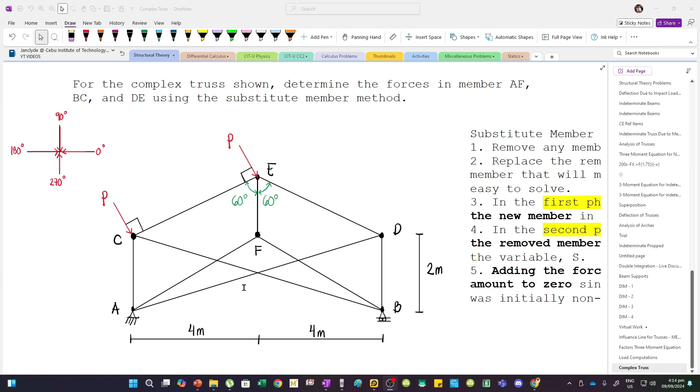So we have this truss. Ito. Imo-model natin yan. Now dito sa app natin, it's ideal to start sa origin talaga. So sa coordinates 0, 0. So yan yung A natin.

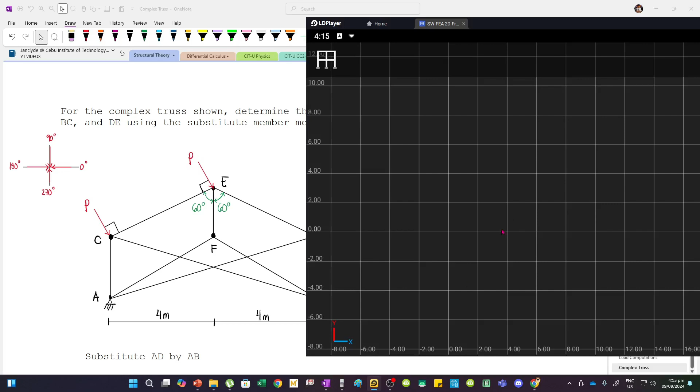So add tayo ng node. Press mo lang to. Yan. And then, wait lang. Remove ko lang to. Ito, merong delete button. Yan. So add tayo ng node sa 0, 0. Diyan. So ito yung nag-act as joint A.

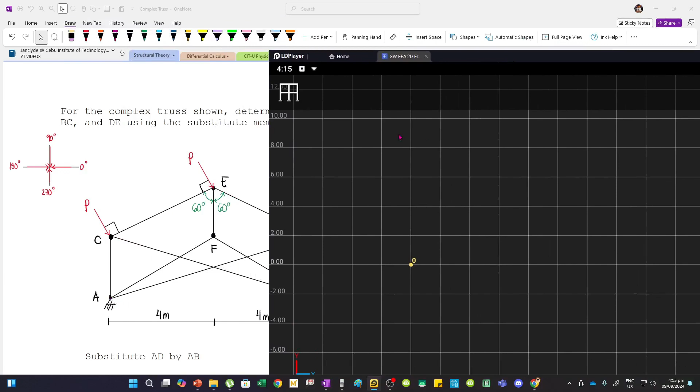So yung joints pala natin, yan yung lalagyan natin ng node. So meron tayong joint sa A, C, F, E, D, saka B. Yan. So next, we have joint C. For joint C, at 0 siya, x equals 0, height niya naman is 2 meters. So, 0 saka 2 meters. Yan. This is joint C.

And then, at 8 meters along X, we have joint B. So, punta tayo dito, and then, 8. Yan, 0 yung height. And then, the same, we also have another joint right here, which is joint D. This one. And then, at 4 meters, we have joint F, still at a height of 2 meters. So, eto, 4, saka 2.

Yan. And then, we have joint E. Now, yung joint E, it requires a bit of calculation kasi hindi natin alam yung length ng member na to. We are only given an angle with respect to the vertical axis. This one, 60 degrees. Now, di ba, along the same line yan, so, we can draw a broken line para mas makita nyo yung triangle.

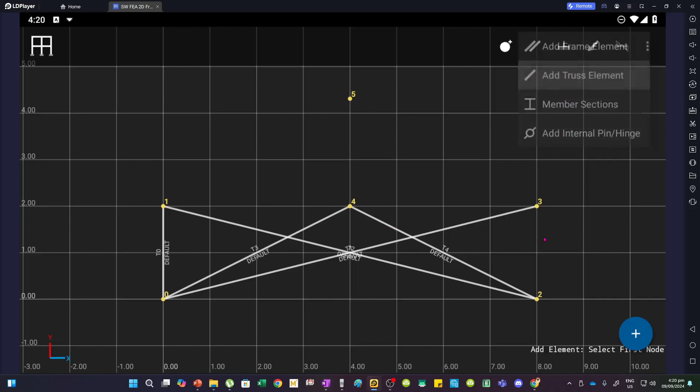Then, we have member BD. So, vertical member yan. This one. Then, we have member CE saka DE. So, we will connect this node dito. And also this one sa node 5. So, ito na yung truss natin.

And then, meron tayong hinge support at A. So, dito ka lang. Ito yung support icon. Press this one. Add tayo ng hinge or pin support. So, just press this node. So, meron na tayong hinge dyan. And then, sa B naman, we have a roller support. So, press this. Then, roller. Lagyan natin ng roller support.

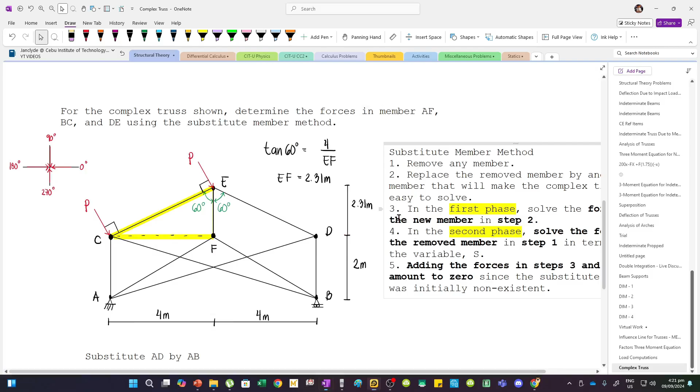Now, yung angle is the inclination of the roller support. So, since walang inclination yan, add lang natin agad. And then, lalagyan na natin ng loads. By the way, meron palang member EF. Kung makikita nyo, analysis failed. Check model. Meaning unstable yung truss natin. So, we have to add this element.

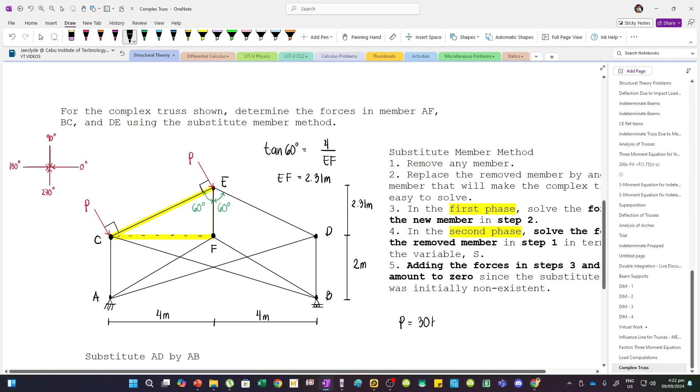And then, we have two forces P acting at joint C saka E. Now, hindi ko pa na-indicate sa problem. So, sasabihin ko na lang na P is equal to 30 kilonewtons. So, dito tayo. Add tayo ng nodal point load to establish loads na nag-act talaga sa joint. So, press the node kung saan nag-act yung load. And then, dito, naka-kips yung load ko.

But, it will not affect our solution kasi pag naka-kips yan, i-ratio niya lang naman. So, di magbabago yung forces in members. Yung magbabago lang is the deflection in trusses. So, I will just retain kips kasi masyadong mahaba na pag i-change natin yung loadings. So, sasabihin ko 30 kips.

And then, the angle of inclination, 90 yan. Ito yung convention natin sa app. Ito yung 90 degrees acting downward. Then, this is 180. Ito yung 270 acting upward. And then, 0 degrees or 360 degrees. Now, our force P is acting downward and to the right. Ibig sabihin, andito siya sa quadrant na to. Diyan yung P.

Now, perpendicular yan sa member CE. If this is 60 degrees, then this is 30 degrees. Now, 30 degrees plus 90 degrees kasi this is perpendicular, magiging 120 yung total. So, if this is 120 in total, merong 90 dito, then dito naman merong 30. So, 90 plus 30, yan yung inclination ng force P. So, lalagyan natin ng 120.

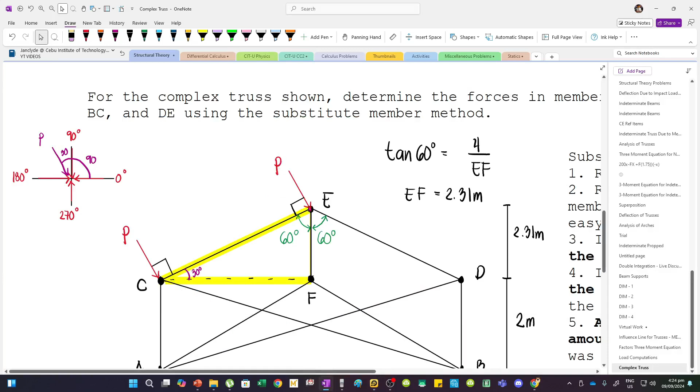So, press save. Meron na tayong force. And then, again, just disregard the units. It won't affect our solutions. Then, dito tayo sa joint 5. Meron din tayong 30 kN, P, acting perpendicular pa rin sa member CE. So, this is still 120 degrees.

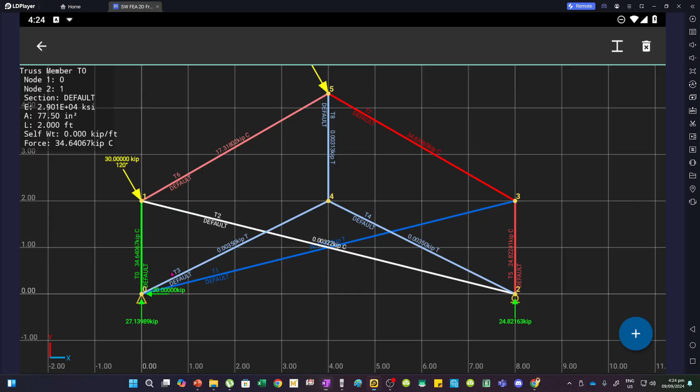So, ito na yung reactions natin. Ito naman yung forces ng members. So, 27 yung reaction dito. Then, to the left, 30 kips. And then, ito yung member force ng AC, 34.64. And then, pag merong C, ibig sabihin compression. Then, kapag T, ibig sabihin tension.

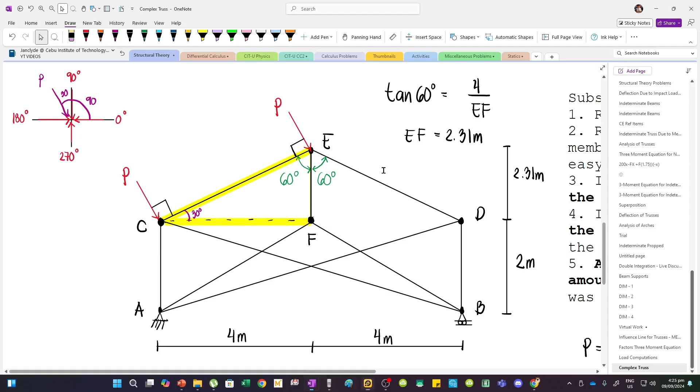So, meron na tayong values. Screenshot ko na lang. Ayan. So, ito yung babasehan natin mamaya. So, ito na yung forces.

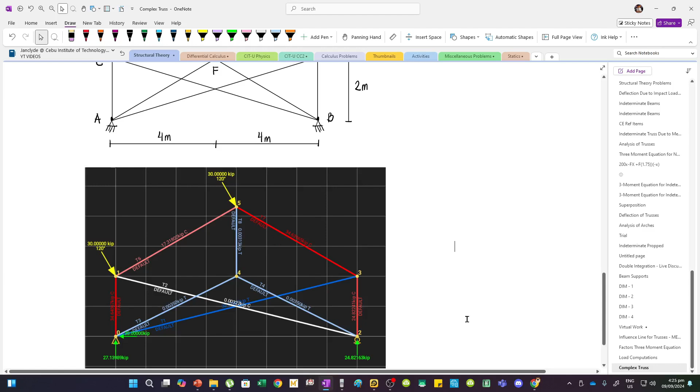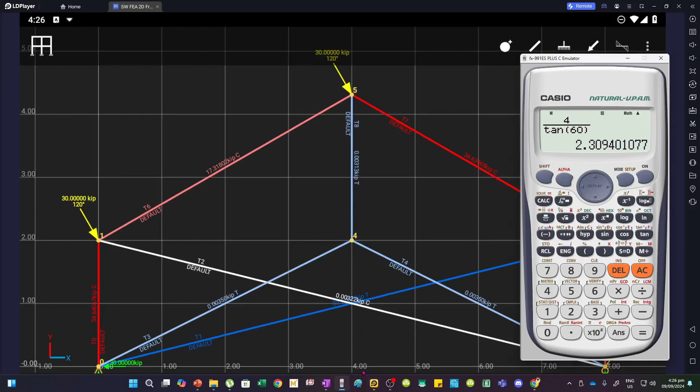Now, essentially, itong mga members na to, this one, and also this one, they are zero force members. Now, hindi lang siya nag-zero exactly kasi nag-approximate lang tayo sa length nito. Alam natin na it should be 2.309, but ginamit natin is only 2.31 for this length. Kaya hindi siya exact talaga. Papakita ko na lang yan mamaya.